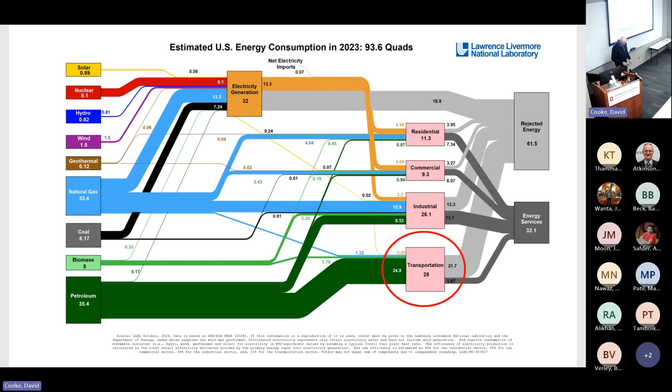So why are we talking about energy and transportation? For this reason: transportation is roughly 30% of our energy usage in the United States. As you well know, because we have internal combustion engines that provide the predominant amount of motive power for transportation, there's an enormous amount of rejected energy. Electricity usage is the tiniest filament here. You can see the vast majority of the fuel we use for transportation is petroleum. Some comes from biomass in the form of ethanol and a bit of biodiesel.

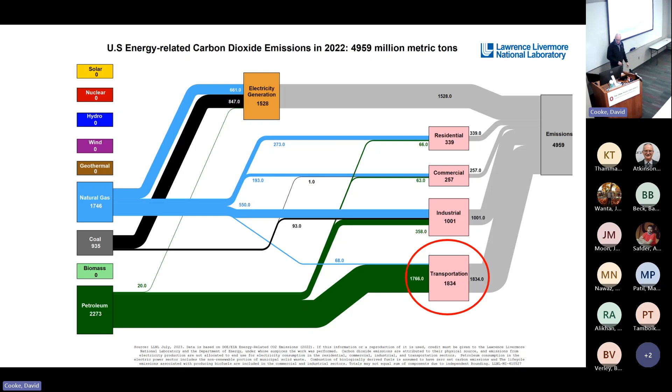This is the Sankey diagram for CO2 emissions. And of course, for transportation, again, it's roughly 1/3 of CO2 emissions. So if we're interested in decarbonization, we have to pay attention to transportation.

Our transportation reality in the US today: we drive 101.5 thousand miles a second. The vehicle fleet in the United States, light, medium, and heavy duty vehicles, drives 100,000 miles per second, every second of every day of the year. Fuel consumption is 6,100 gallons per second, split between gasoline and diesel, 74% gasoline. This tanker here, which is truncated, the biggest of the single trailer tankers, every 1.5 seconds in the United States, 24 hours a day, 365 days a year, the equivalent of one of those goes into the fuel system. Of course, some of our fuel is delivered by pipeline, so it's not all tankers, but that's the equivalent. Ethanol production, we're at about E13 for gasoline, so 13% of our gasoline pool is ethanol.

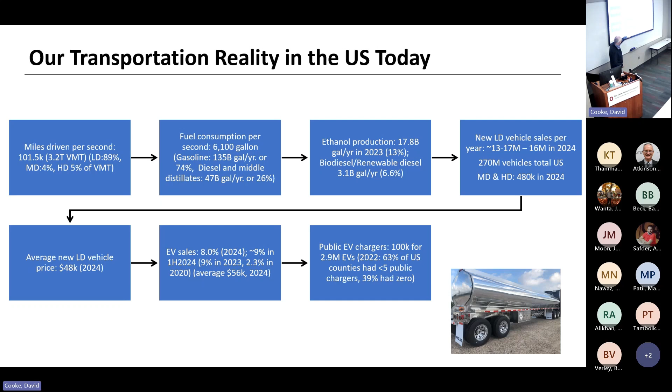Biodiesel is about 6.6% of diesel. We used to sell 17 million vehicles a year, new light duty. It's now 16, and about 480,000 medium and heavy duty vehicles are sold every year. Average new vehicle price has actually come down in 2024. It was higher in 2023. EV sales are about 9%. We'll talk more about that in a while. Public EV chargers, really problematic.

Okay, so this is the summary. Decarbonization of transportation is a global imperative. If we seek to reduce CO2 emissions, and of course CO2 concentrations in our atmosphere, we have to decarbonize transportation. There's going to be differences across the world due to policies, regulations, societal pressures, and hence the technologies used across the world will vary.

Generally, light-duty vehicles are being electrified, but we're seeing a reversion to HEV, hybrid electric vehicles, and plug-in hybrids, mainly due to consumer acceptance problems. We'll talk more about that. Medium duty is mostly well suited to electrification and can be a very fast follower, using pretty much the same technologies as light duty. Heavy duty, which includes on highway, off highway, marine, and rail to a certain extent, is in a state of fuel confusion. They don't know what fuel to use. We don't know what fuels will be used.

Indecision and paralysis. Aviation, remarkably, they hire very good marketers and very good lobbyists. They've determined that there will be this magical fuel called SAF, sustainable aviation fuel, that will fall out of the sky in the right quantities, in the right places, at the right cost, and they will take advantage of that. Currently in the United States, SAF production is 0.1% of jet fuel production. So they need to scale up by 1000x, which means they will use every last ton of biomass available and more, which means there'll be none available for light duty gasoline, none available for any other application. Biomass will be the main limitation for low carbon fuels.

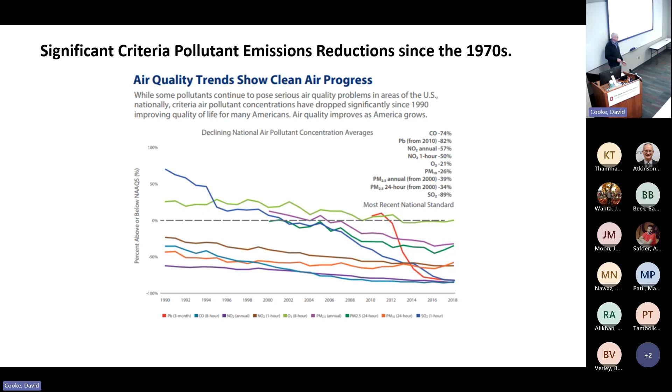Of course, CO2 emissions from transportation have not decreased to the same extent. They've decreased slightly, mainly due to improved fuel efficiency of vehicles. You can't get a 90% reduction in CO2 emissions unless you go to full electrification.

So we collectively have fought since the 1970s for energy independence. You've heard of the first, second, and third oil shocks in the 1970s. And remarkably, even as recently as 2008, we were importing enormous amounts of oil and natural gas. Bear in mind, we imported from across the world, but we import a lot from Mexico and Canada.

But in 2018, we crossed that net zero point. We now export significantly more energy than we import. We still import some crude and a bit of natural gas, but we export significantly more in the form of finished products, specifically LNG. We're now the world's biggest producer of both oil and gas, and that all occurred in the last 20 years or so, due to the magic of horizontal drilling and hydraulic fracturing.

So we fought since the 1970s for energy independence, and we've achieved it. It's remarkable. We fought for a reduction in criteria pollutant emissions since the 1970s, and we've largely achieved that too. What we haven't achieved is a significant reduction in CO2 emissions.

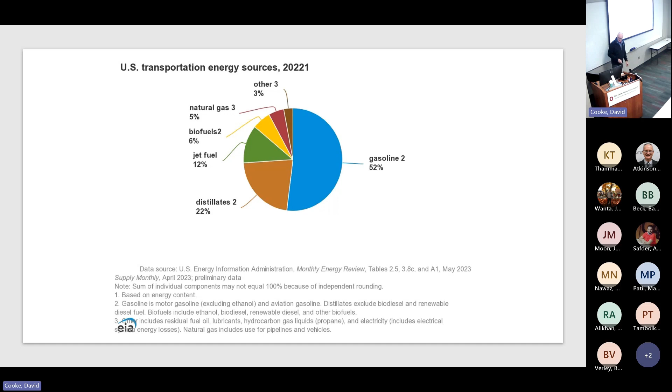I'm going to show you the same data in multiple ways here, but these are the transportation energy sources. You can see gasoline is fully 50% of our energy. Jet fuel is a middle distillate kerosene type fuel, and these distillates are essentially diesel fuel. Biofuels, 6%, natural gas, 5%. The remaining 3% includes electricity, which is a tiny, tiny slice of our current transportation energy sources in the United States.

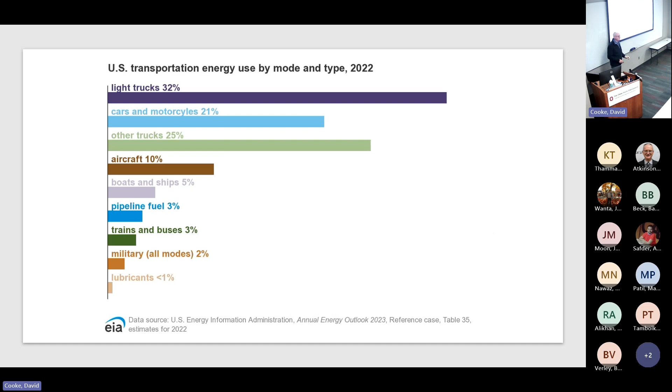I did warn you that I'd show the same data 7 different ways. Light trucks—pickup trucks, sports utilities, minivans—dominate, and then cars and motorcycles, other trucks which are medium and heavy duty, and then aircraft is roughly 10%. Pipeline fuel is 3 or 4%, used predominantly for natural gas compressors, which compress natural gas.

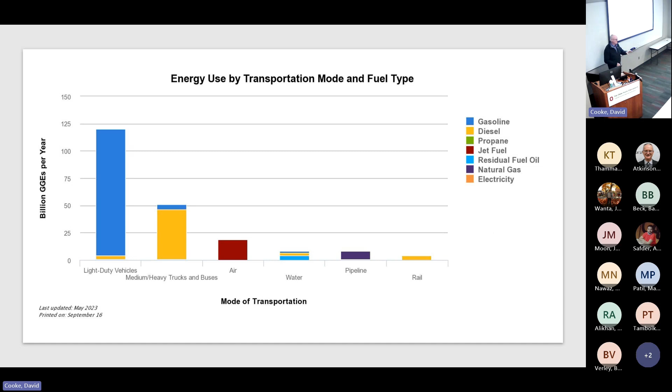Same data again, showing predominantly gasoline usage in light duty vehicles, predominantly diesel usage in medium and heavy duty, kerosene or jet fuel used almost exclusively for air, pipelines consuming their own fuel that they pump, which is natural gas, and rail predominantly using diesel or middle distillate fuels. Water is a mixture—that's water on inland waters in the United States and coastal waters in the US.

Okay, so from the 1970s onwards, we looked for alternative fuels because we needed energy independence. We did not produce enough oil and natural gas for our own use. So from the 1970s onwards in the United States, there was an enormous amount of alternative fuel investigation. What we typically did is compare any new fuel—be it natural gas, propane, CNG, LNG, methanol, ethanol, DME, hydrogen—help me out with some of the 1970s and 80s alternative fuels. That might be just about it.

We compared them to diesel and gasoline within these 9 categories: combustion characteristics, emissions production, how the fuel is produced or generated, its safety—which included toxicity and flammability—fuel storage on board vehicles, how it would affect vehicle range, fuel dispensing and distribution, availability, and energy independence.

Did it contribute to US energy independence, or did we have to import it? Consumer acceptability, which involves vehicle range and so on, but also convenience of use and dispensing, and then cost and economic consideration. The reason I'm showing this is that to a certain extent, when we decided to go to vehicle electrification, we decided to waive many of these. I'm not sure why, but we did. I'll return to this in a while.

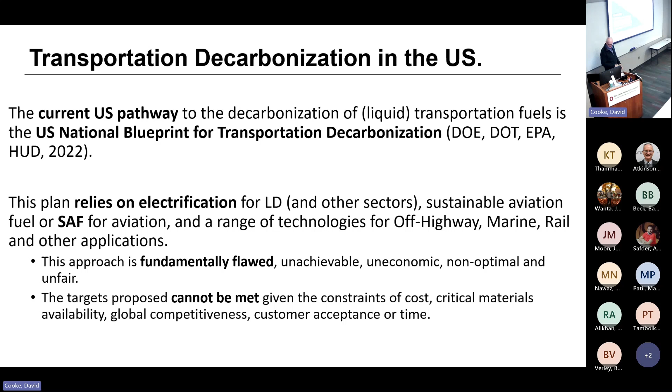This is the blueprint, which you should know. It's the DOE, DOT, EPA, and HUD. And this is the summary of it, essentially.

Light duty vehicles, predominantly battery electric. Hydrogen, long-haul trucks, predominantly. Sustainable liquid fuels, aviation, maritime. Again, as I said to you, aviation at 11% will consume every last available ton of biomass in the United States produced on an annual basis.

And this plan doesn't take it into account at all. I just wrote off hydrogen, so you can exclude that. And I've told you that sustainable aviation fuel will take every last available amount of biomass. So it shrinks all of that to that category alone. It gets rid of that. So what does it leave for the rest? Well, it doesn't. That's why it's not well thought out.

It's non-optimized. And again, it's not fair. Why is it not fair? Because the marine and rail and heavy duty truck people are there floundering for an energy source because electrification won't do it for them, and because aviation has co-opted every last ton of biomass. It's completely non-optimal. What the DOE and DOT did specifically was to optimize sort of in one dimension only. They didn't do a full multi-dimension.

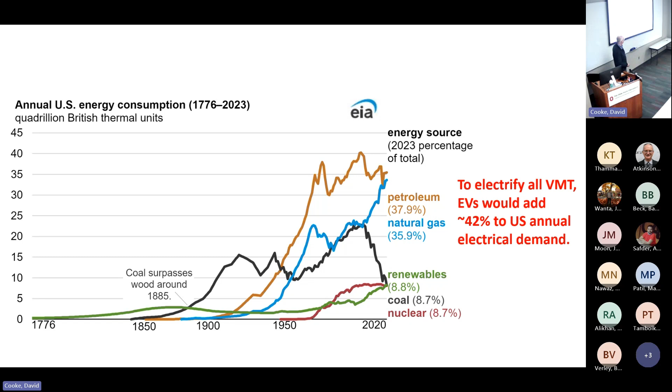It's 5x transportation alone. This is another way of showing the same thing. What we have to do is the vast majority of petroleum is used for transportation fuels. Some of it is used for petrochemicals, as you well know. Most of the natural gas, about 90% or so, is used for power generation. The balance is used for things like fertilizer production and other petrochemicals.

What we have to do is we have to take that fossil fuel share and make it up in these renewables here, not in the nuclear, of course. Well, perhaps we'll increase the nuclear, but again, it's a matter of time. So we need a massive increase in renewable energy, 5x over today, a huge grid build out. People vary on estimates, but doubling of our high voltage grid is not unrealistic to contemplate, especially because the wind occurs predominantly up the spine of the country and solar is more predominant in the southwest.

EVSE availability will need to increase by about 100x. Again, that's an estimate. We need 2x energy storage improvement. Why? Because my vehicle currently drives 200 miles of range, and really most people demand 400 miles. David told me today that he gets 100 miles. That's the scope, when it's this cold. Yeah, yeah, it's a significant problem.

Or we could increase biofuel production by 10x over today. With E13, we could use all of our gasoline and some of the diesel, but that's not likely to occur. Or some combination thereof, right? That's what is required for decarbonization.

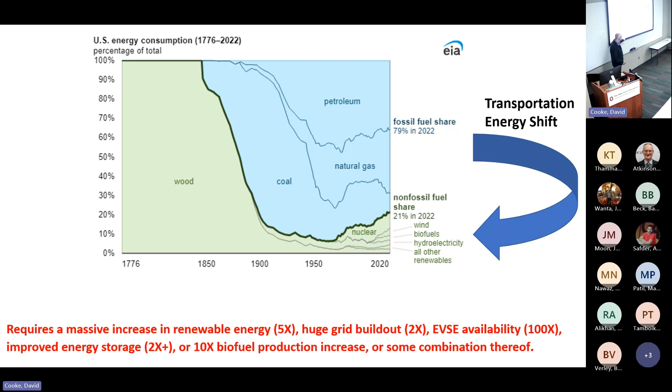We need 5x renewable energy, 2x in the grid, 100x in EVSE availability, 2x improvements in energy storage, 10x biofuel production, or some combination thereof. So we need 6 revolutions, as I call them: renewable energy generation, that's the 5x; grid, 2x; charging, 100x; and critical materials and components.

You've no idea, an enormous amount. EV and battery manufacturing, that's actually where we're doing remarkably well. We'd give ourselves sort of a B+ grade because it's easy to put up a new production plant. Sourcing the materials is a different story.

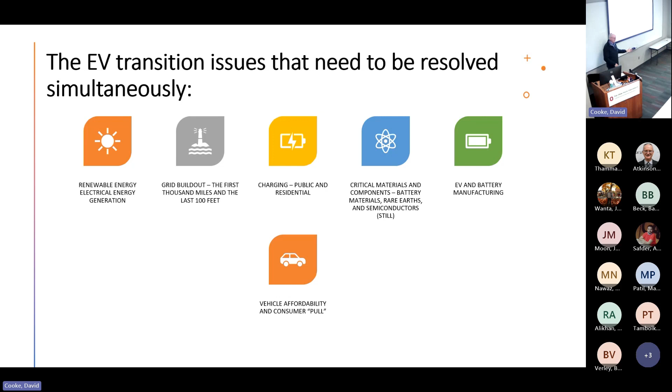Then, of course, the 6th revolution is we need to improve vehicle affordability and the consumer pull. We need to make these vehicles more consumer acceptable from many points of view: increased range, increased performance, reduced cost, increased availability of charging away from home.

These things are proceeding at differing rates across different timescales. We're in the beginning of a decades-long transition. It's been artificially pushed in the last 4 years, I would say. It's going to take trillions of dollars—consumers, corporations, and taxpayers—trillions of dollars in the aggregate.

Critical material supply, just as an example. As I say, we're doing very well with battery plants. We would require 62 gigafactories. There's 15 that have been announced to date, but of those, 4 or 5 have been cancelled in the last year or so. That's without grid storage. If we want significant grid storage, that will detract from the production that could be diverted towards transportation.

Of course, you've heard about rare earths for motors and many other critical materials that are significant. So we need battery materials, rare earths for motors, and many other critical materials for everything from semiconductor manufacture throughout.

A shift to more mineral-intensive energy systems: EVs take 6 times the mineral inputs of a conventional car. Offshore wind plant requires 13 times more mineral resources than a similarly sized gas-fired power plant. So 6 and 13—enormous increases in critical materials production required.

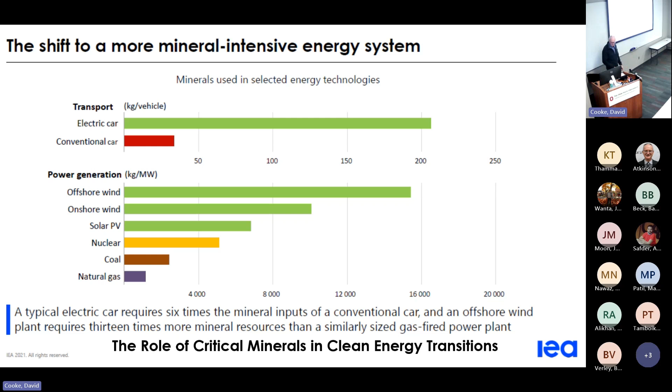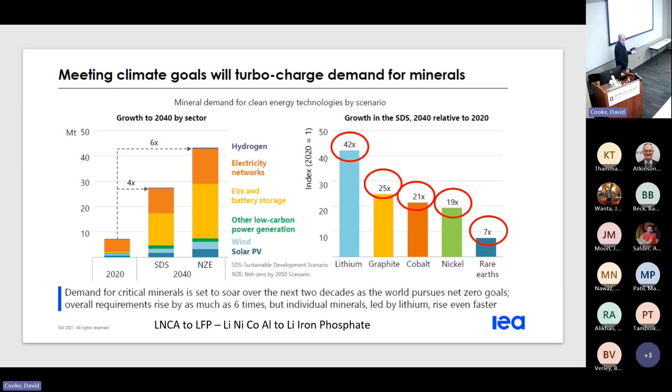There's a looming mismatch between material supply and our climate emissions goals. Copper has a significant shortfall, but the shortfalls in lithium and cobalt are significant. I've ringed these for lithium, graphite, cobalt, nickel, and rare earths. We're going to need between a 7x and a 42x production increase—that means mining, beneficiating, and processing, all three. The scale and scope is mind-boggling.

So essentially, in 2018, we were energy independent—the United States achieved energy independence. Pretty much on the same day, we decided that we would go all out for electrification, especially on the light duty side. And on that day, we became 100% dependent on China. Not 99, not 90, not 50%, not 5%—100% dependent. So we flipped virtually on a given day, from complete independence to complete dependence.

People say, what about recycling batteries? Well, once EVs are 100% of sales—who knows how many decades that will take—roughly 10 years after that, you can achieve full circularity. So it's whatever day you achieve 100% sales plus 10 years; that's when you can achieve full circularity. Another ironic thing is about lead acid batteries.

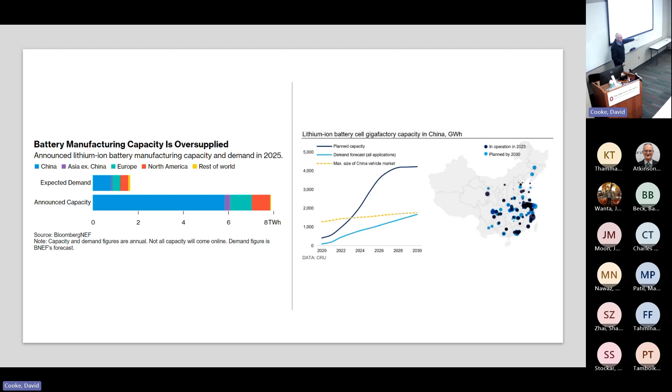What does that mean? A 400 watt, 450 watt panel, which is the basic panel, is $45. You can put that up for $45 and it'll give you, under full sun, of course, 450 watts for 8 hours a day for 30 years. It's a remarkable, remarkable achievement. The PV module prices have been driven down to below the cost of materials as of 2024, below the cost of materials.

There's no reason to assume that the same could not happen with lithium-ion batteries. What I'm telling you is that whatever price, if you're a battery manufacturer, whatever price you say you'll be able to achieve, Chinese manufacturers will undercut that. And they'll continue to undercut it and continue to undercut it until essentially they drive everyone else out of the business, as they have done for PV modules.

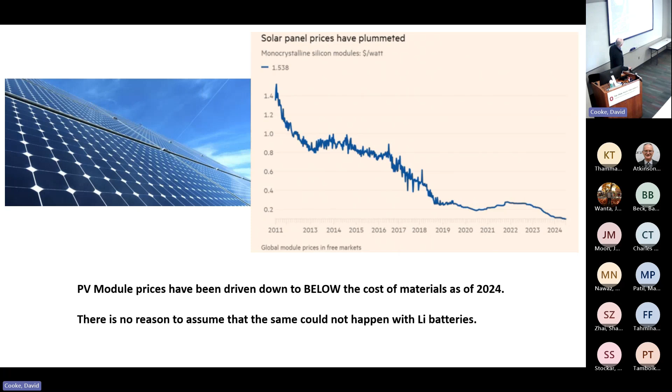They're essentially riding the tiger, as they say. So any cost you might imagine for a lithium-ion battery to be produced in the West, they will undercut it. What does that mean? It means, for example, in Europe, the first, or maybe the second wave of Chinese EVs are entering Europe. They will simply dominate the market because they're being brought in at costs that no established European manufacturer can match, not by a long shot.

And they're already at 25%. They can grow to dominate the full EV market. Bear in mind that by 2030, pretty much the whole European light-duty vehicle market will be EV. So they can simply destroy the European industries. And you're seeing this, the German manufacturers are now fighting back to a certain extent, but they're fighting a rearguard action. It's very late in the day.

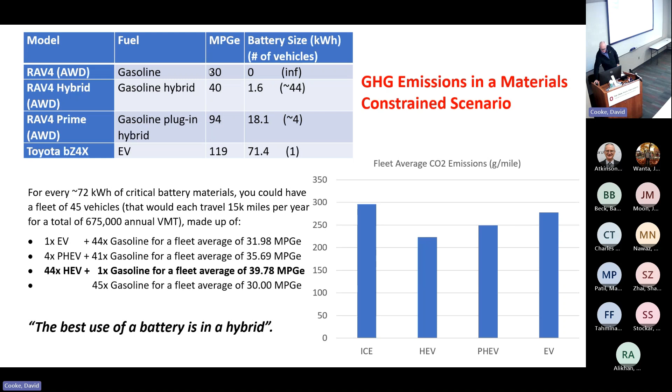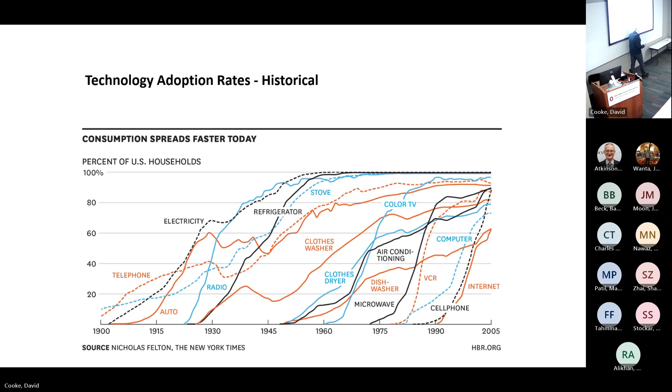Technology adoption rate. People say EV uptake will be as fast as the internet, right? The answer is no, we're in uncharted territory. We've only ever seen very steep uptake rates when the capability of the new technology is significantly better than the old technology, or when costs are reduced significantly. That's not the case with electric vehicles.

It's not the case with EVs, except when required through legislation, like tailpipe emissions reduction, when we introduced fuel injection, catalytic converters, or airbags. Uptake rates are significantly high when they're required to be so.

If you take 2011 as the start of this EV revolution, since that's when the Tesla Model S started taking off, the Biden administration said there was no EV mandate, but essentially said 50% of all vehicles needed to be EV by 2030, and 100% by 2040. If you take that as the desired trajectory, we're currently flatlining.

The early adopters have bought vehicles, but the middle, the mass market, has yet to buy them. Why? Because they're more expensive and less capable. The middle market relies on cost and consumer attributes, so if EVs are more expensive and less capable, they won't buy them. That's the consumer resistance we're seeing.

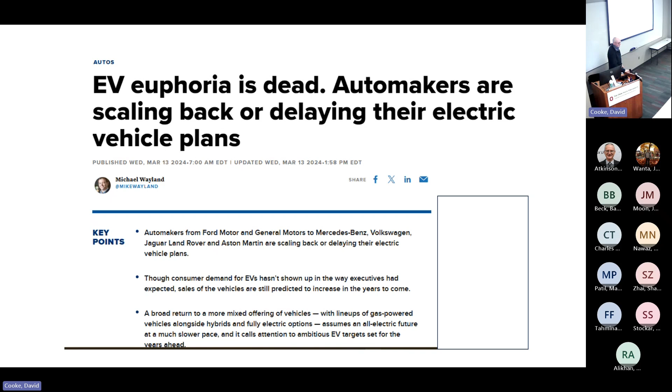EV euphoria is dead — this is from a year ago. Automakers are scaling back. You can read the press every day; it tells you how the OEMs are scaling back on their EV plans.

Consumer acceptability is another issue — things like onboard storage, range, and refueling capability. A heavy duty diesel truck gains 180 miles of range per minute. A gasoline vehicle gains 300 miles per minute. The charger in my garage gives 0.35 miles per minute. A 150 kilowatt charger gives 7.5 miles per minute. So this is the difference.

Again, it's a consumer acceptability issue. The cost is nice and low, but recharging or refueling is problematic.

Government interventions and incentives — I had to add this here. The tax rebates up to $7,500 were rescinded yesterday. There are incentives to manufacturers and the EVSE build out, but another of his executive orders yesterday said that all money yet to be spent on public charging needs to be given back. What can the government do? It can set standards — things like V2X connectivity, automation — we don't know. And of course, EVSE chargers.

So why will electrification essentially not trace the trajectory people believed it should or would? It's these things in red: emissions reduction and life cycle assessment — we haven't done a proper LCA on EVs, we gloss over it. The generation of the fuel needs a 5x build out in renewable energy. Onboard storage is problematic, fuel dispensing and distribution, the chargers, is problematic. Energy independence — yes, we produce pretty much all the electricity we consume, we import a bit of hydro from Canada, but not the critical materials. Consumer acceptability is problematic, and cost is problematic.

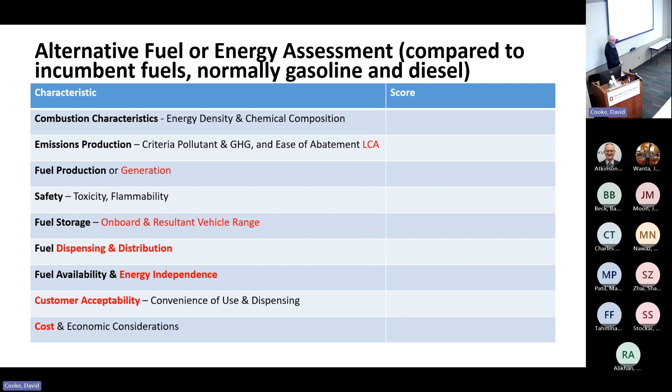So as I say, if this is the rubric we used in the 1990s to dismiss LNG, CNG, methanol, ethanol, ammonia, hydrogen, DME back in those days, this is the same rubric we should apply to electrification. But in summary, decarbonization and electrification are well underway, but there are many, many issues.

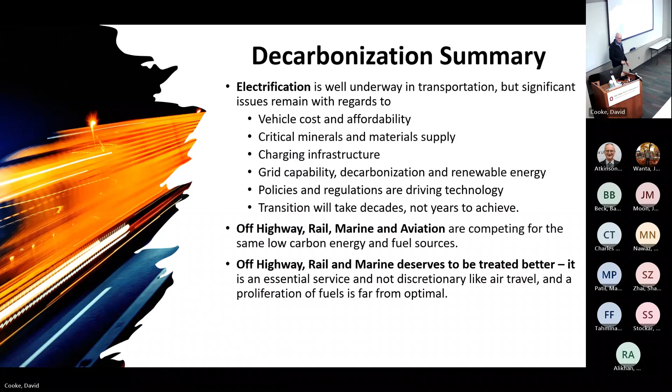Off-highway, rail and marine. One thing we learned from the pandemic was that we're absolutely critically dependent upon trucking, marine and rail for the things that we need. Aviation, in many cases, was shut down. Australia, for example, limited air travel into Australia for 18 months, and they survived just fine without air travel, but nobody survived without heavy-duty trucking, rail and marine. Yet somehow we've decided that aviation will have access to sustainable aviation fuel, while off-highway, marine and rail are on their own. What they're going to use, nobody knows. Ammonia, hydrogen, DME—nobody knows. And that's wrong.

We're trading energy independence for a complete dependence on imported critical materials. The transition is going to be very, very messy, and it's going to cost trillions of dollars just in the United States alone. It's perceived as significant uncertainty. This approach needs a reset. We can achieve 90%, 97% decarbonisation of our electricity system if we allow aviation to continue to use fossil-based fuel. We could save trillions of dollars. The net difference in terms of decarbonisation is trivial, but cost and disruption will be kept to a minimum.

So what does that mean? Well, I think there's going to be a reversion to engines and hybridization—ever-improved powertrain efficiency, new engine architectures, hybridization. There'll be increasing electrification. The consumer has gone back to hybrids and plug-in hybrids, and the industry should do the same. What I showed you earlier was that the optimum in the near to medium term is more hybridization, and the far long-term goal is electrification.

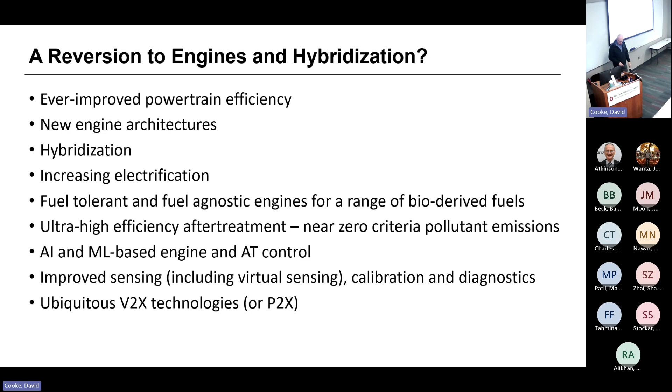We're going to have fuel tolerant and fuel agnostic engines for a range of bio-derived fuels, ultra high efficiency after-treatment, near zero criteria pollutant emissions. Of course, CO2 will still come out of the exhaust if they are carbon-based fuels, but if they're bio-based fuels, we can do the life cycle analysis on this. AI and machine learning based engine and after-treatment control, improved sensing including virtual sensing, calibration and diagnostics, and then ubiquitous V2X or powertrain-2X communications technologies. There's no reason why powertrains can't be smarter than they currently are.

That's a good segue into vehicle automation. There's ADS, automated driving systems, which is essentially full self-driving of a vehicle, versus ADAS, advanced driver assistance systems. Is connectivity a requirement? I think it is—connectivity vehicle to vehicle, or vehicle to infrastructure, or infrastructure to vehicle. CV2X is cellular vehicle to everything. The problem with CV2X is it's the same technology you use on your phone, currently 5G, and that's a non-safety critical technology. So if your phone call drops out, or you can't Google something, or your ChatGPT or YouTube fails, it's not an issue. But it needs to be safety critical for vehicle automation.

Vehicle automation uses machine vision, perception, sensor fusion, real-time path planning and prediction, real-time decision making. But the number of driving scenarios that must be accommodated is absolutely enormous—hundreds of millions, if not billions. How safe is safe enough? If an AV is just as safe as the average driver, is that good enough? Probably not. There's the risk and severity of failures, the N+1 problem: there's a probability and a risk and a severity that tails off, but if you truncate at a certain point, the very next potential problem that could occur is essentially as severe as the one you've truncated at. I'm putting it badly, but you can perhaps see what I mean—if you train a vehicle for the first 1,000 potential occurrences, it's the 1,001st that'll come back to bite you.

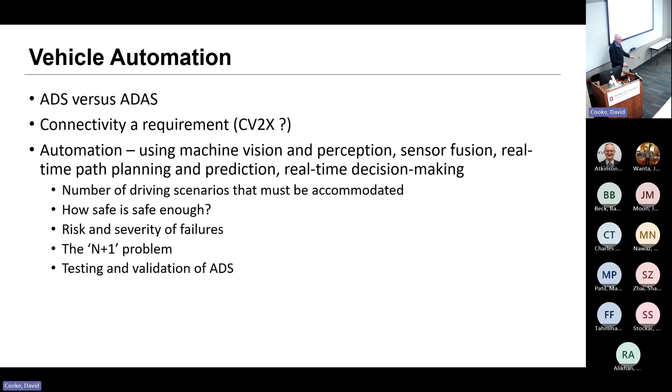That's an issue. Testing and validation of ADS—we don't know how to do it. We certainly don't know how to do third-party evaluation of ADS. And this gets to my point: road traffic safety is the largest issue we face today, and it's truly an existential crisis. In 25 years we will see over 1 million—by the end of next year, choosing arbitrarily 2000 to 2025, we will have seen over 1 million highway fatalities in the United States. Well over 40,000 per year currently. That's an issue. It's a tremendous issue.

We're at about one highway fatality every 80 million miles. If you exclude pedestrians, vulnerable road users, and very old or very young or newly licensed drivers, it's about 1 in every 250 million miles. If you get rid of people driving under the influence, it's more like 1 in every 500 million miles. So if you want an AV to be substantially better than the average driver, it needs to have the intelligence essentially of a billion-mile driver—it doesn't need to have driven 1 billion miles, but it needs that intelligence or capability. It's a tremendous issue.

There's a large number of other problems, as you know. If you have a very large portion of machine learning or AI in your system, and you trained it, in essence, over that 1 billion miles, each mile in that training carries identically the same weight as every other mile.

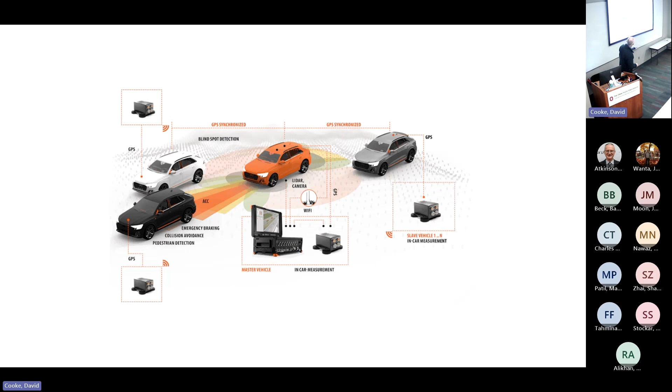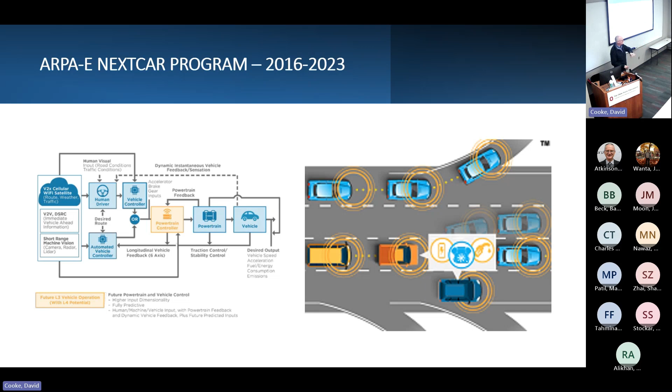This is just a cartoon that I showed. The NEXTCAR program, which I started at ARPA-E back in 2016, was to use very low levels of automation and connectivity to improve the energy efficiency of individual vehicles. Ohio State is a competitor in that, both the first and second phase. But the idea there is that you're marrying connectivity, automation, and the notion of improving energy efficiency.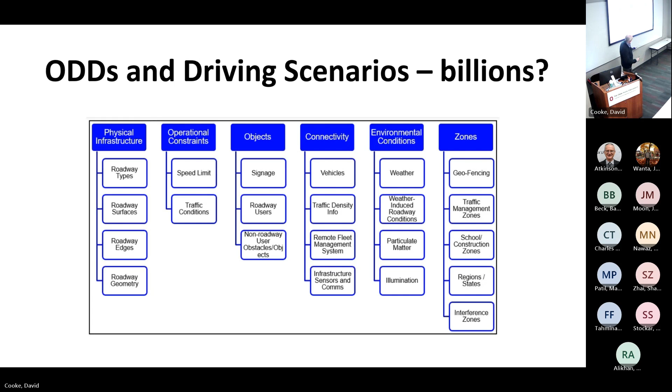I've driven in a Waymo cab in Phoenix, Arizona. Has anyone else been in one? Absolutely amazing, an incredible experience, just unbelievable to experience. But there's a good reason why they use it in Phoenix: flat roads, no speed over 45 miles an hour, multi-lane roads laid out in grid patterns, perfect sight lines, no on-street parking, very good weather most of the year, a perfectly benign environment to train AVs.

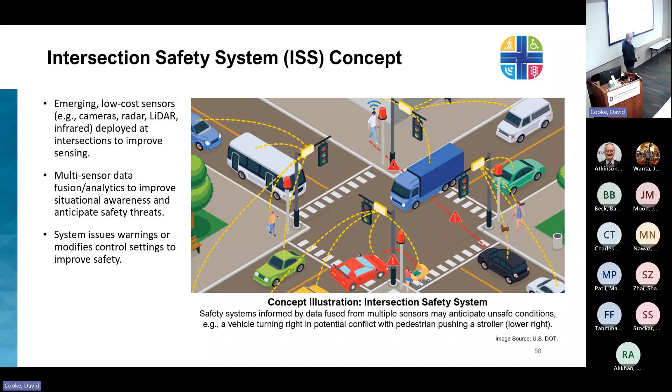And that's the challenge of the intersection safety challenge: to acknowledge AV technology is advancing, but not as fast as we had hoped. Can we take those technologies out of the mobile domain, put them in the fixed domain, and serve to improve the safety of intersections? So data fusion, AI, machine learning—a low-cost, high-value opportunity.

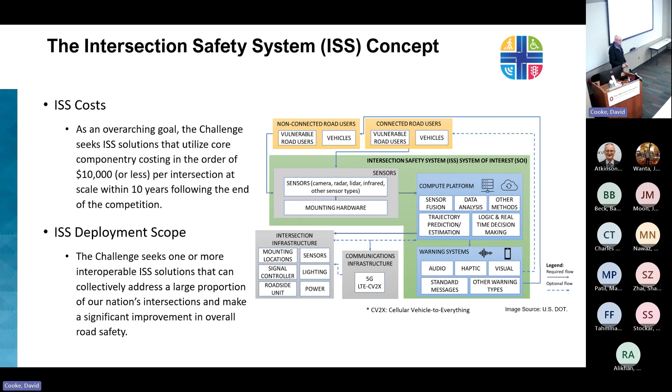This is a cartoon of it. Again, Ohio State is an entrant in this and has received money in both stage 1A and stage 1B. Now I need to show you the video. This is a 3-minute video or so showing the sort of data that we developed for people to train their systems on.

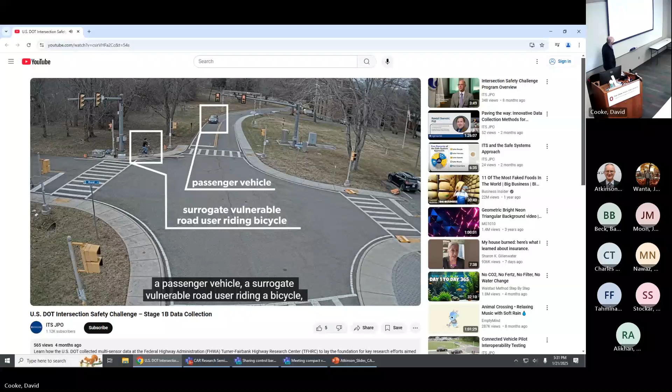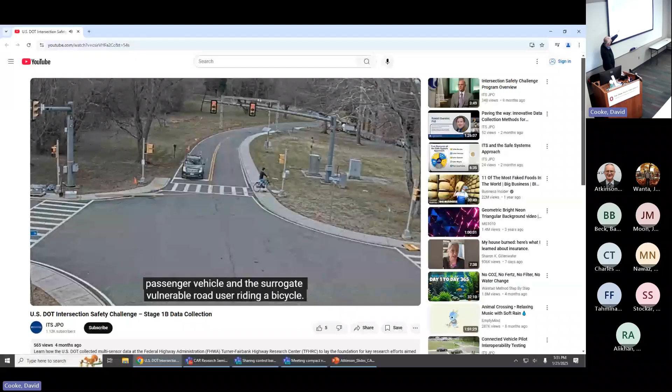This is a very simplistic scenario, but there's a cyclist who went across the intersection against the light. This is nighttime. It's so-called occlusion, where the view is partially blocked. So there you see the vehicle actually hit the dummy.

Why am I showing you this? Because for the first time, we showed you 3 scenarios. There's 800 such scenarios, covering 4 times of the day and night, all weather conditions, all lighting conditions, all traffic conditions. So 3 very simple ones were shown, but including, up to the point of vehicles striking dummies, surrogate road users. A remarkable data set. And vast majority of it was just released last Friday by the DOT. The point I'm trying to make is there's low-hanging fruit we can use in vehicle connectivity and automation technologies that can improve the safety of our roads today. It's a remarkable thing.

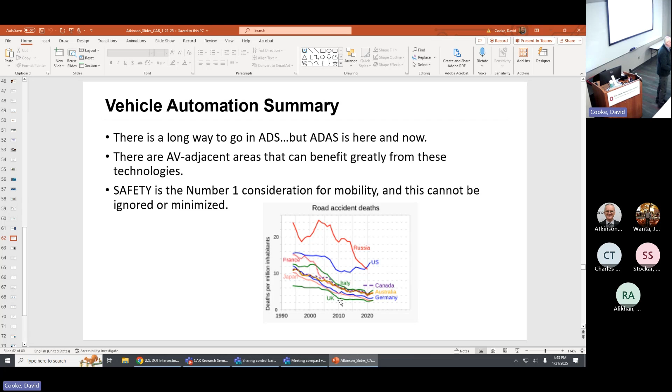I'd urge you to Google US DOT Intersection Safety Challenge, and the data has been released. There's people in the room who are involved in the intersection safety challenge. The whole data set has now been released publicly, with the idea of trying to urge people to come up with new and novel ideas and ways of using that data to improve roadway safety.